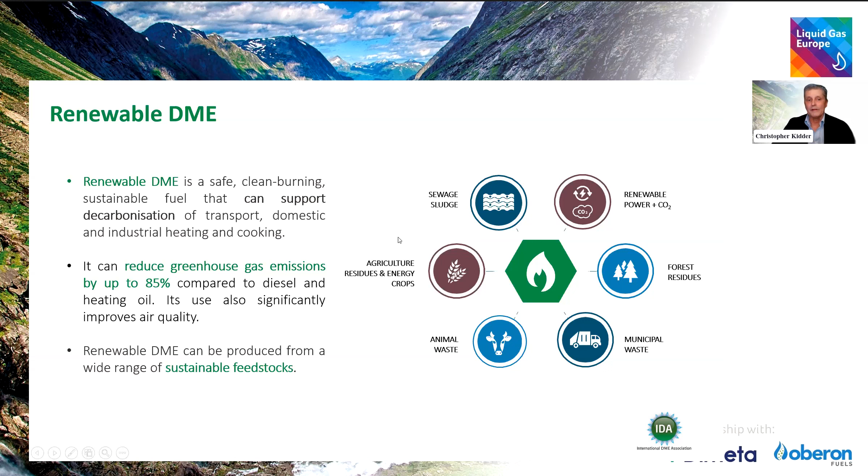In terms of the European objectives, DME offers a very compelling case as a decarbonization enabler, a low barrier to entry, given that DME is currently produced in relatively modest commercial quantities, but certainly the announcements we've seen over the past year and a half or so related to the potential production of renewable DME, both in Europe and North America, offers some exciting possibilities and enabling factors for this.

GHG emissions up to 85% reduction. I think we're going to hear a little bit more from Dr. Rebecca Boudreaux about that. Some of these numbers initially came out of California and their work there. And then certainly the reduction in criteria emissions with zero sulfur oxides, much reduced nitrogen oxides, and zero particulate emission, which is an incredibly important and attractive possibility for the transportation market, the diesel market.

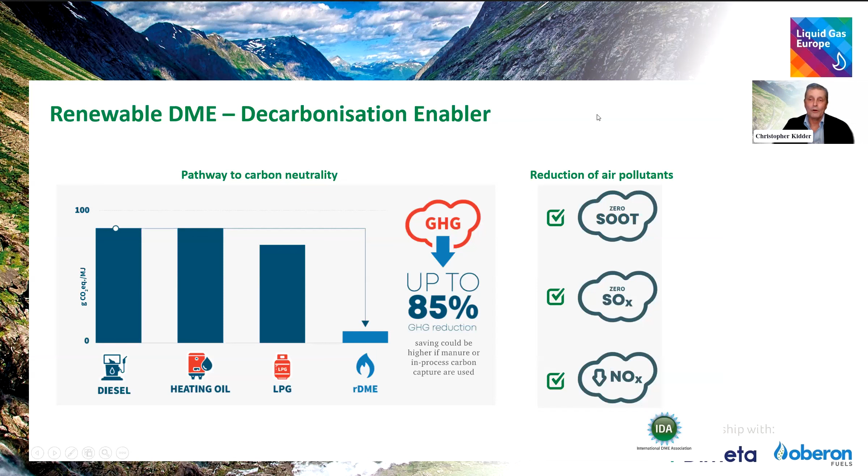Typically, and until now, commercial applications for DME have revolved around DME's use in heating and cooking. This was particularly the case in China, but this was fossil DME, made from coal to methanol to DME.

What we're talking about now in North America and Europe in particular is the enormous and quite practical immediate carbon reduction that could be achieved if renewable DME is blended into LPG for use in heating and cooking, both domestic and industrial. John mentioned earlier, 40.7 million European households currently located in rural areas are simply not connected to the grid. This offers a huge potential with very modest modifications and implementation for the logistics in terms of introducing low carbon renewable DME to these customers.

And we talked about the blending as well, up to 20% DME by mass blended with LPG with no modifications to equipment. Again, offering an enormous amount of attractive, practical, and practically immediate benefits to this huge customer base.

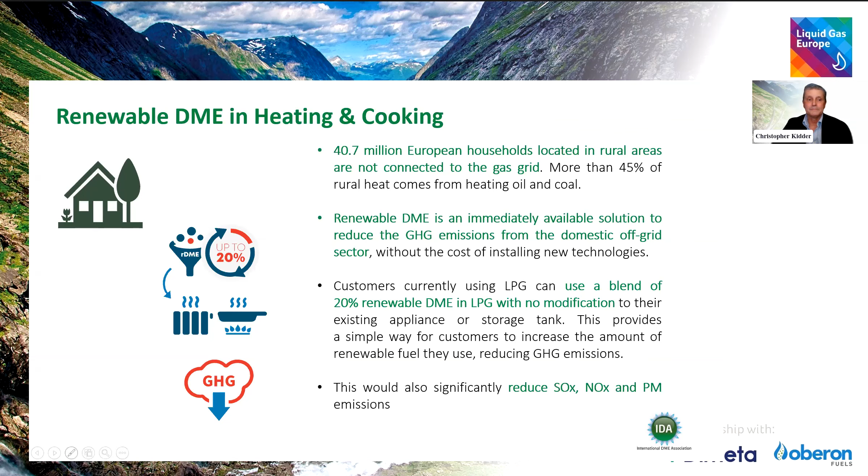Renewable DME in industry. This is a huge potential market, obviously also covering heating, cooking, industrial high temperature heating.

And other very difficult, hard to abate, hard to decarbonize areas, which offers a huge potential, possibly better than many of the electrification options being talked about.

Coal or oil-fired boilers could also be replaced with DME boilers. There's been extensive work already done, mostly in Asia, by major manufacturers of boilers using DME.

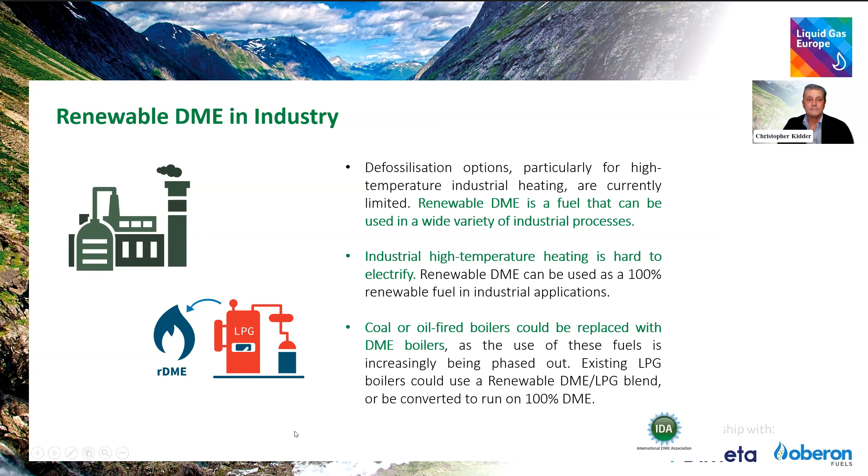Especially as these fuels are increasingly being phased out, this offers a very attractive and compelling option. And then, of course, transport. This was always initially seen as the initial potential channel to market. Companies, major international global leaders in heavy-duty diesel, such as Volvo, Mack, Ford, Isuzu, have done extensive work, millions of kilometers of demonstrations, and this is still something very interesting. The IDA had its 9th International DME Conference in Switzerland this year for the specific purpose of speaking and seeing some of the work being done by Fiat Powertrain, the global manufacturer best known probably in Europe for Iveco engines.

They are doing work on this as well. And with renewable DME, it offers an even more attractive option in addition to the lack of particulate matter and the reduction in criteria emissions.

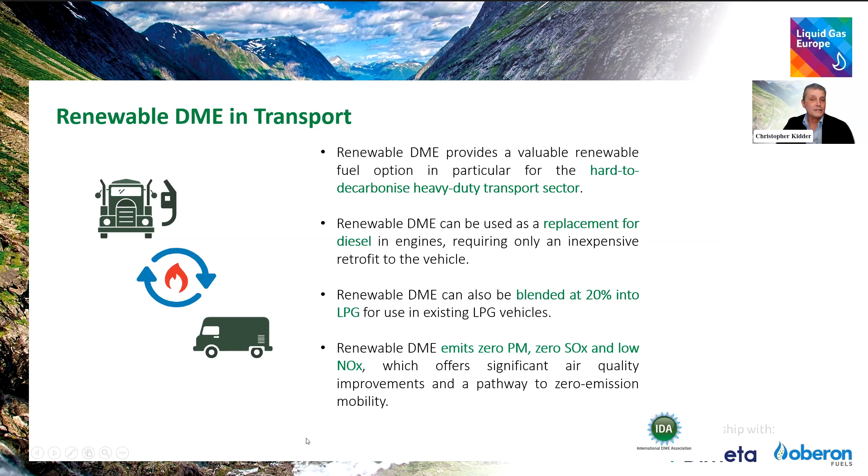And then lastly, but certainly not least, I'm going to mention Oberon Fuels again, where they are leading the drive into this application with DME as a hydrogen carrier. Surprisingly to many, a liter of liquid DME contains more hydrogen than a liter of liquid hydrogen. So this is a very attractive option, one in which they're working with one of the US national laboratories. And there's a straightforward process that can convert DME back into hydrogen for use in industry, transport, domestic heating, and cooking.

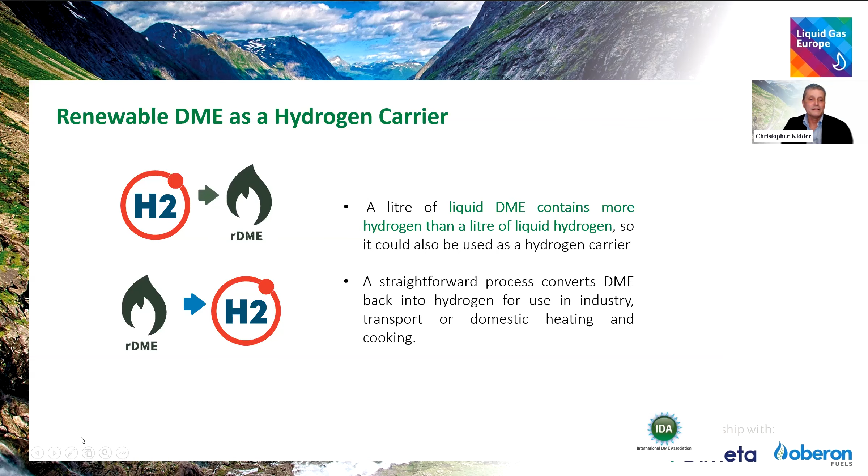That's a brief primer. I invite everyone who's on this webinar to join us for our monthly briefings, where we have people like those assembled today giving updates about this, about recent developments, and more information about the applications, especially for renewable DME. Thank you very much, John.

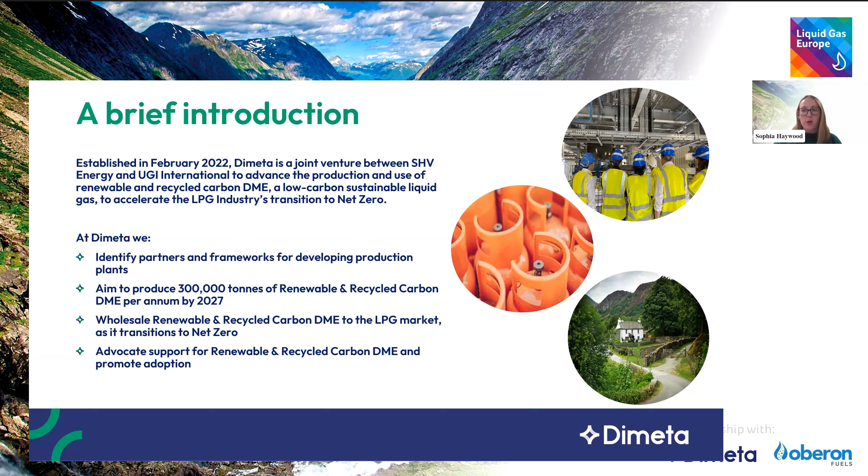We're working with people on this call and many others not on the webinar today. I won't spend too long on this, but it's important to mention that we work across the whole value chain - covering R&D through to project development, commercial supply, and myself on advocacy and communications. We really are covering a wide range of areas for a new business.

Focusing a bit more on the subject at hand - defossilising European heating and transport. The first time I heard 'defossilising' I had no clue what it meant, and I think a lot of people will be in a similar boat because there's all this new terminology coming around. But what it fundamentally comes down to is the fact that there is a real need.

And that's where the real benefit of renewable liquid gas comes into play, whether that's renewable LPG or renewable DME.

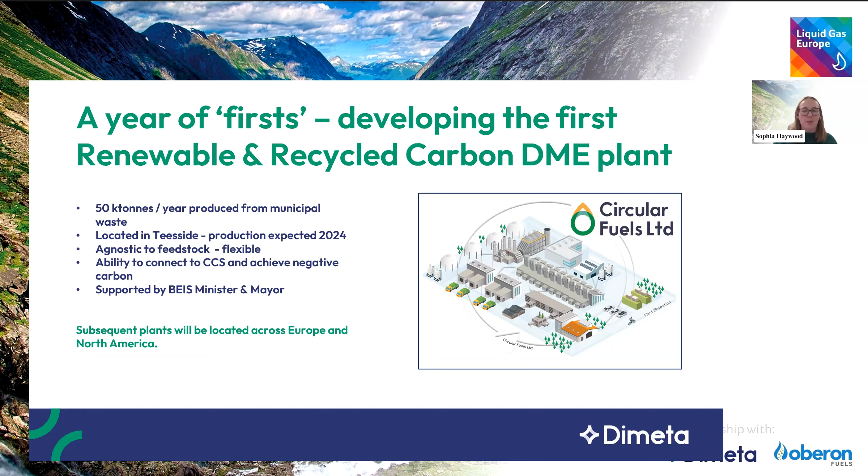But one thing for the industry, and Chris, you also touched upon the importance of innovation. I'm sure we're going to hear a little bit more from Rebecca now in terms of that innovative process that happens. We're looking at building more partnerships, so we're not just focused on one route and one feedstock to producing renewable and recycled carbon DME.

For example, in October of this year, we went into a collaboration with a company called Enerkem, who you may have heard of. This is the first company in the world to produce renewable methanol and ethanol from non-recyclable, non-compostable municipal solid waste at a full commercial scale.

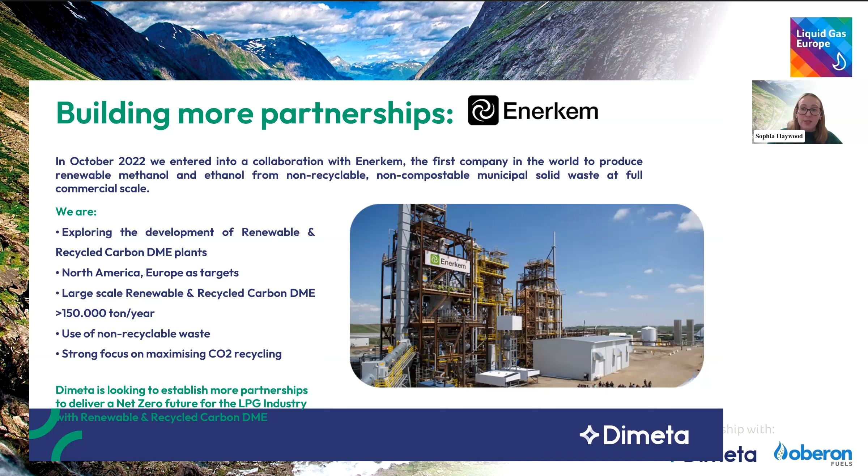So we're looking at exploring the development of a different type, a different level of plant, a different scale. We're looking at something that is circa 150,000 tonnes per year with a strong focus on maximising CO2 recycling. So again, we're looking to establish more partnerships, work with industry, work collectively, and accelerate the industry to reach its goals, which it's laid out with. And John, I'm sure you'll talk more later on in terms of the ambitions the LPG industry have set out in terms of delivering a just transition to net zero.

I'm not going to go on any further. This gives you a little bit of a flavour as to what we're looking to do in Europe. I think as a sector as a whole, we're at the start of that journey, and I'm really, really excited, genuinely, to see what can happen not just in the next 12 months, but beyond. So I look forward to the rest of the discussion, and any questions I will answer later on. Thank you, John.

Thank you very much, Sophia. And as you said yourself, this is an exciting series of developments, renewable and recycled DME, not just in a presentation, but actually stuff happening on the ground. That's very exciting and very encouraging as well, and that's in Europe.

And now I'd like to introduce you to Rebecca Boudreaux, who is the President and CEO of Oberon Fuels, who's going to talk to us about renewable and recycled carbon DME, new but old, a California case study. How exciting is that on a drizzly, cold December day? Thank you, Rebecca.

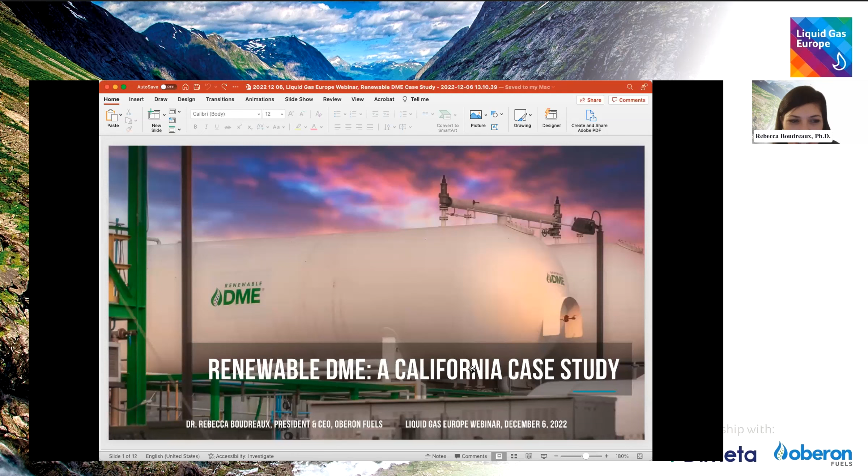It's exciting to talk to you about a California case study on renewable DME, providing a perspective from the work we've done over the past 12 years in California, but now as a US and EU citizen sitting in Hamburg, Germany. It's fun to talk about California and what we've learned there, and how we can translate this to the European context—the lessons learned that can be built upon even though we're in a different geography, to accelerate this transition.

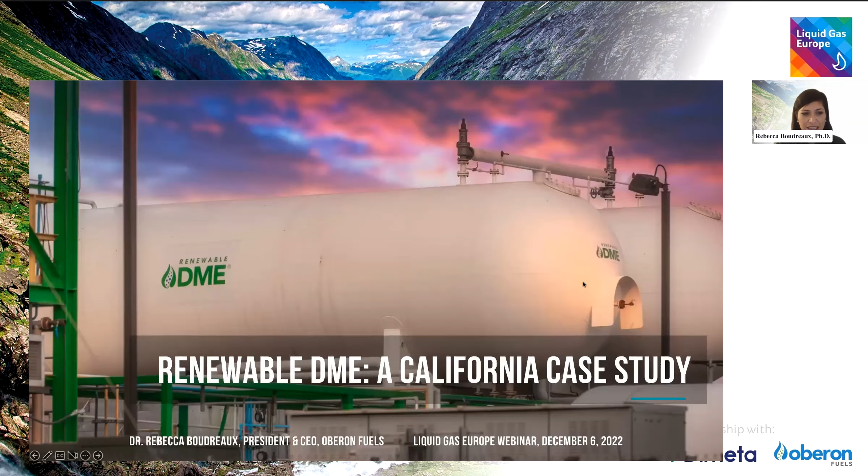I want to start the case study timeline in 2010, when Oberon Fuels was founded in California. But it's important—and Chris alluded to this in his talk—that this work is built on over 30 years of work done beforehand. We're standing on the shoulders of giants in innovation, and that's how innovation happens: people continue to iterate, discover new things, take it to the next level, and keep going.

In the early 90s, for example, DME was already being used as an aerosol propellant, but Theo Fleisch and Ron Sills were some of the founders who really took DME and looked at it as a transportation fuel, initially as a diesel replacement, and then beyond that, LPG blending. Many people on this call were in the early days of DME.

So when Oberon came in, in 2010, you saw this—and this is California. People mostly think of the palm trees of San Diego, Los Angeles, the fog of San Francisco, the Golden Gate Bridge, but outside the city centers there's a huge rural community in California, very large agricultural communities, very large farms. This is our Maverick Innovation Center, where we produce the first renewable DME in the US, and across the street are 10,000 cows—so on a windy day it can be a little rough, but this is a very agricultural community. A lot of things can be translated among rural communities around the world.

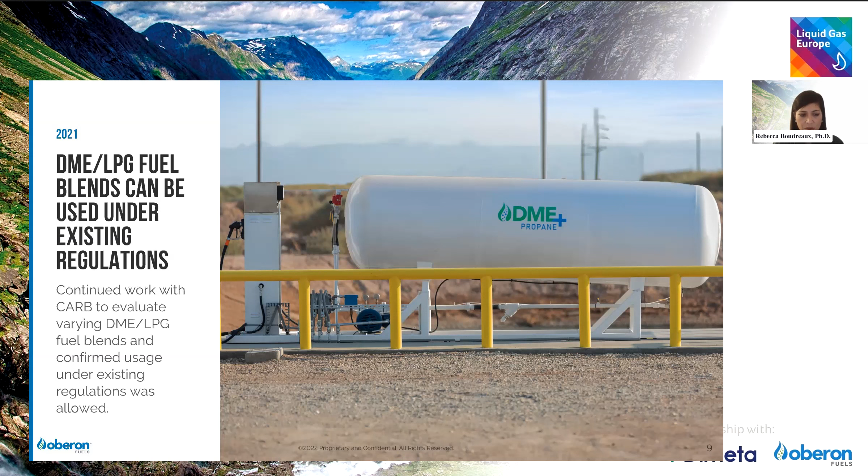And these, again, on the regulatory front, as we push forward, we continue to engage with the California Air Resources Board, making sure these blended products, renewable DME and LPG, can be used under existing regulations. So we engage with the fuels team to evaluate that, confirm existing regulations allow their sale. And then ultimately, just this year in 2022, renewable DME LPG blends are being sold in California today.

So the US's 3rd largest LPG company, Suburban Propane, is blending in Oberon's renewable DME from the Maverick facility that you saw photos of, and selling to customers today. Those customers are using it on road in vehicles, as well as in forklift applications at the 4 to 5% blend level. So excited to start getting renewable DME into a product. We're introducing renewable content and continuing to push forward.

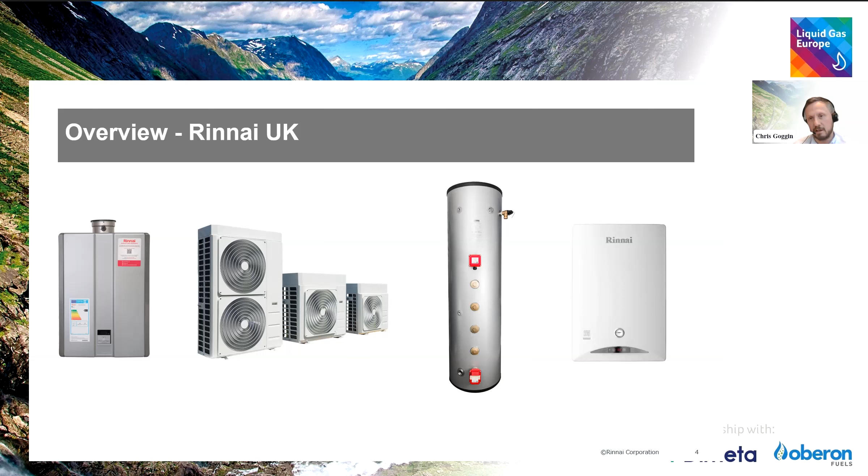So we can be considered somewhat technology agnostic in this debate, and I think that's an important consideration when we look at the technical, practical, economic, and carbon intensity of a range of applications.

In our view, there is potential for renewable liquid fuels to offer an economical alternative to heat pumps and conventional electric and oil-based systems. Where heat pumps could help decarbonize buildings off the gas grid, multiple studies, including one by Liquid Gas UK, have shown about a third of homeowners would not be able to afford a new heating system at any given price. Heat pumps can be very expensive and are somewhat beyond the reach of certain demographics and business owners, and conventional electric heating is not recommended for certain archetype buildings, as we've seen in multiple studies.

Oil and LPG have historically had similar costs. However, more importantly, LPG offers considerable carbon savings when compared to oil-based systems.

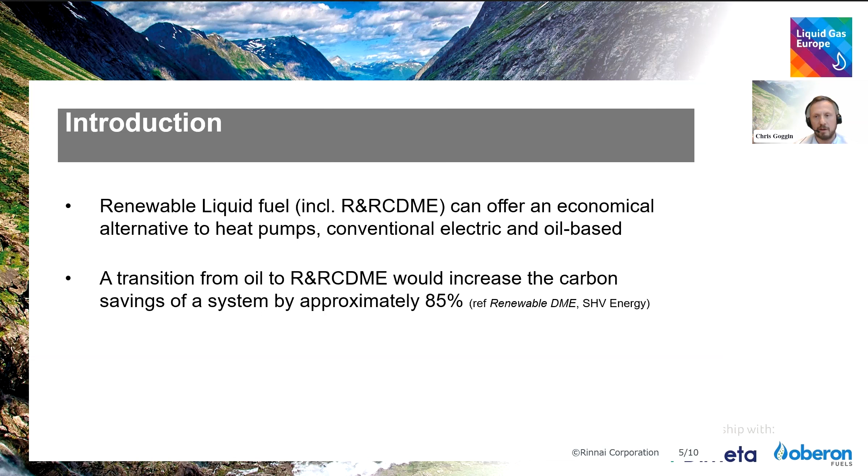It's also worth mentioning that the same appliance can be operated on LPG if we were to convert over to bio-LPG or a blend of LPG and renewable liquid fuels, thus eliminating the need for replacement equipment, technologies, upheaval of pipework, downtime, additional costs caused by remedial works, and enabling a smooth and potentially cost-effective transition from LPG to 100% renewable liquid fuels in the future, while also having a fairly profound impact on carbon throughout that journey.

For instance, if we were to consider a campsite off the gas grid, it would be incredibly difficult to replace the LPG water heating system by going all electric. We'd put a lot of pressure on the battery and the electrical infrastructure around that area. Typically in this environment, we'd be talking around 200 kilowatts of gaseous appliances just for the ablution blocks. When you add the need of supply for cooking and other electrical equipment, you can see it has quite a huge draw on some of these off-grid energy infrastructures.

Another area we do a lot of work on at the moment is the dairy farming sector, which is a high volume, high temperature application that would require a high volume of storage, probably in the format of electrical storage, which would create practical and economic issues for a lot of people we've spoken to.

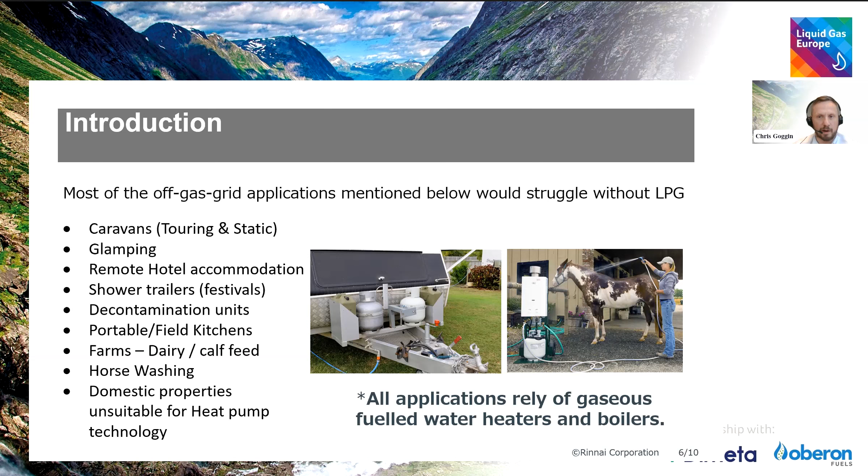So we need to be thinking about alternative applications away from all electrification. This comes from high hot water temperature requirement, high hot water volume requirement, system performance, and requirements for ancillary heat sources, particularly when we talk about hot water requirement.

The milking requirement needs extreme high temperature of 85 degrees for bacterial pasteurization. The flow rate is very high. We would need about 116 kilowatts, dependent on specification, and we would do this instantly with no storage requirement. The water passes through the system, heats it instantly, and puts it to the outlet via instant heat that's provided on site in a relatively small footprint.

The working principle shown is it just passes through the LPG, bio-LPG, and a renewable and recycled carbon DME blended system, because there'd be no requirement to replace it, direct to outlet, without being prescriptive over what blends are going to happen, because that's not down to me.

But if we were to look at a renewable and recycled carbon from municipal waste blended with LPG in a format of 80-20, which is quite often discussed, we could expect to see a carbon reduction of 14.5% from the LPG by just having that system transition to the blended fuel. There would be no need to replace any of the hardware or update any of the system requirement, but it would decarbonize as the gas decarbonized.

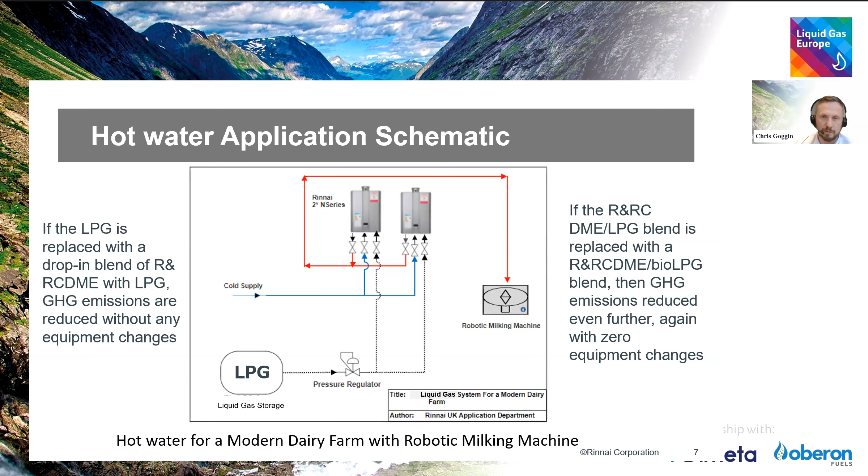So if you've looked at that from a carbon intensity perspective, you can see that practically we can reduce carbon with a very pragmatic route by defossilizing the fuel.

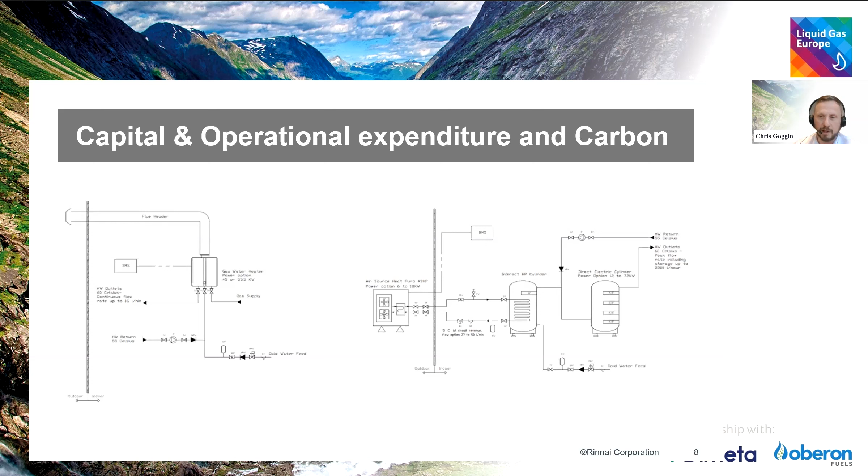So one of the things that we like to measure when we specify gaseous systems, hybrid systems, or heat pump systems is how that's reflected in life cycle and CapEx costing.

So if we were to compare the fiscal and financial impact of the previous schematic: the systems that often give clients the biggest reduction in carbon and the biggest reduction in expenditure would be the gaseous system down here. When you're moving up to all-electric, over the lifetime of that system it's a lot more expensive in terms of running and CapEx costs. A lot of that is held in the capital expenditure, but over its lifetime, the system is a lot more expensive.

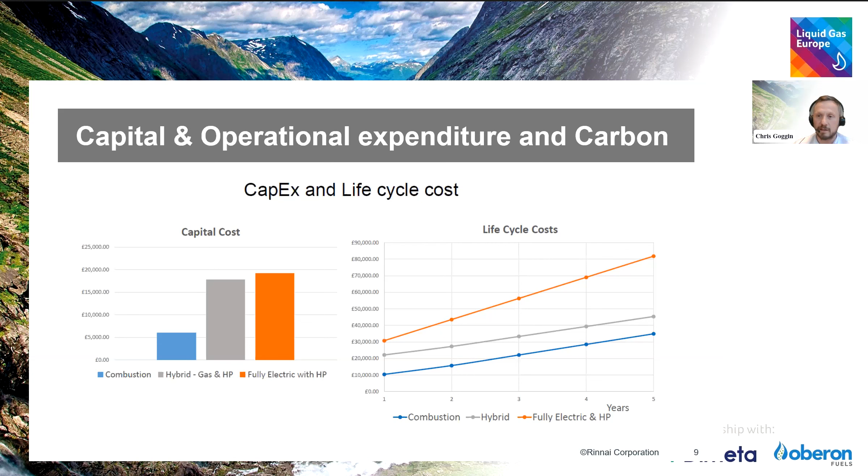So therefore, when you consider this gaseous scenario, a very pragmatic solution, when you consider that from practical, technical, and economic feasibility, is again to reduce the carbon of the gas going into that system.

As stated in the report, where LPG is used within the incumbent water heating and boiler, and it's still used in the future with blended or renewable liquid fuels available, this would use the existing infrastructure and heating technology, which would lead to the potential for both capital and operational expenditure savings for the end user, whilst also having a pragmatic decarbonisation pathway of lowering the carbon intensity of that system.

Renewable and recycled carbon DME is not seen as a solution to decarbonise heating across the EU. However, this can play a significant role for areas with poor or moderate insulation, or where technical, practical and economic feasibility issues for all-electric and heat pumps are prevalent.

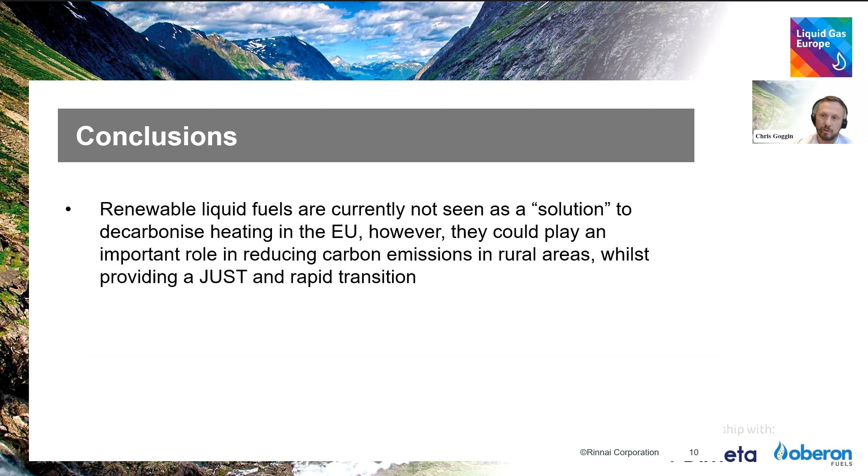I hope that this basic overview from these angles gives you an insight into what can be achieved by defossilising the fuel and using the existing infrastructure. As I've mentioned, you can contact me on LinkedIn or directly via my email to discuss any of these factors further, and whether we can do some carbon calculation and CapEx modelling for any sites you may have in mind, to see what that impact is across a range of electric, gaseous and renewable fuel technology. Thank you.

Thank you very much for that, Chris. Probably you could call that a view from the coalface or the front line. So the issues associated with making use of renewable and recycled carbon DME - three things I took from that, three phrases: a pragmatic solution, a just transition, and let's use existing technology where we can. Three very important things, I think, there. Chris, thank you very much for that.